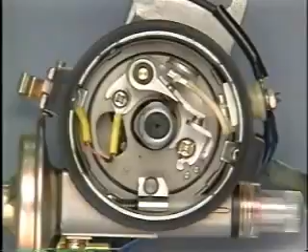Conventional systems use contact breaker points in the distributor to turn the switch on and off mechanically, just like this device.

But today, most systems make use of the switching effect of a transistor, or an electronic control unit, or ECU.

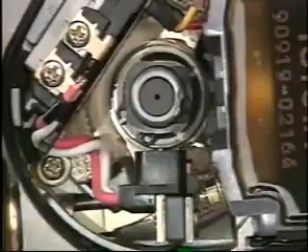Now let's take a close look at how a high voltage is generated using an actual transistorized ignition system. An ignition coil, a signal generator, and an igniter are integrated with the distributor.

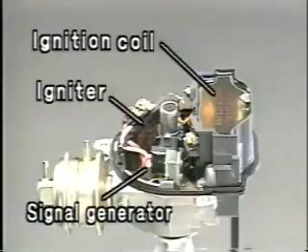In the transistorized ignition system, the ignition signal from the signal generator is transmitted to the transistor in the igniter. This transistor turns the primary current in the ignition coil on and off.

The signal generator has three components: a signal rotor, which makes one turn for two revolutions of the crankshaft, a pickup coil, and a permanent magnet. The rotor turns clockwise or counterclockwise depending on the engine.

As the rotor turns, a voltage is generated in the pickup coil. This is the ignition signal. But why is a voltage generated?

The magnetic flux of the permanent magnet flows through the signal rotor, the pickup coil, the bracket, and returns to the magnet. When the rotor is still, there is no change in the magnetic flux.

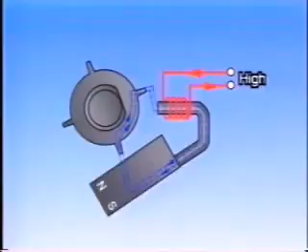When the signal rotor rotates and a rotor tooth approaches the pickup coil, the magnetic flux density increases. As the rotor tooth moves away from the pickup coil, it decreases. This means that the voltage generated in the pickup coil depends on the changes in the magnetic flux.

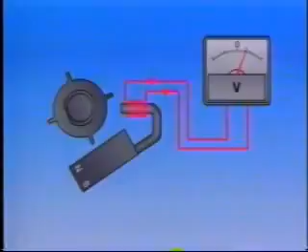The level of EMF generated depends on the relative positions of the rotor and pickup coil. When a rotor tooth approaches the pickup coil, the EMF increases, and when the rotor tooth and the pickup coil face each other, it becomes zero.

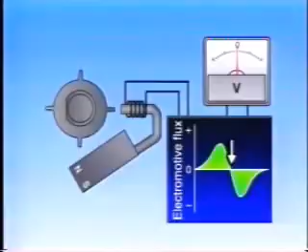When they move apart, a counter EMF is generated. These changes in the EMF cause the igniter to switch the primary current on and off. Let's take a look at how the current is turned on and off.

The engine is running and the signal rotor approaches the pickup coil. The voltage is generated in the direction shown in the diagram. The base current flows, the transistor switches on, and the primary current flows in the coil.

When the signal rotor's tooth is aligned with the pickup coil, the voltage generated in the pickup coil decreases and the transistor is turned off. This cuts off the primary current and generates a high voltage in the secondary coil.

The transistor is also turned off when the voltage is generated in the opposite direction in the coil. In this way, when the engine is running, the transistor is turned on and off every time one of the signal rotor's teeth passes the pickup coil.

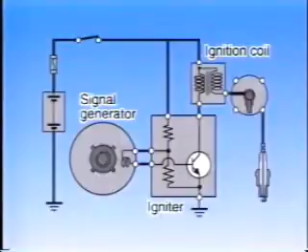Every time the transistor is turned off, a high voltage is generated in the secondary coil. This voltage then passes from the distributor's center electrode through the rotor and from the outer electrode to the spark plugs, according to the firing order of each cylinder.